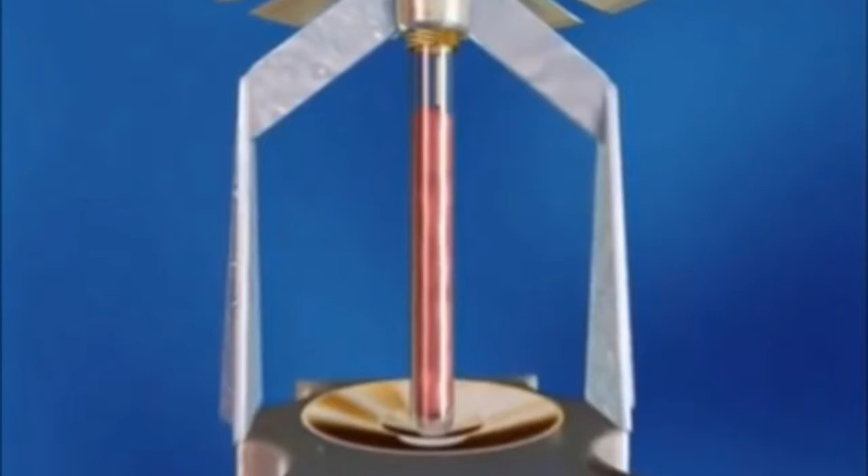Next is the automatic sprinkler system. This system is designed to detect, control, and eliminate fires and warn fire residents. The automatic sprinkler system is usually located at the ceiling in every class, office, library, laboratory, hall, mosque, toilet, and canteen. The sprinkler system is connected to a water distribution.

As you can see here, when heat is detected, the glass component in the sprinkler head fails, thereby releasing the water from the sprinkler head.

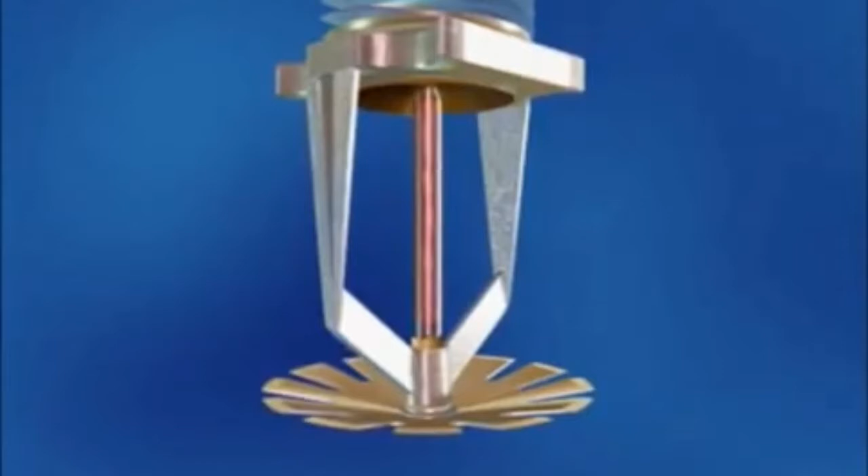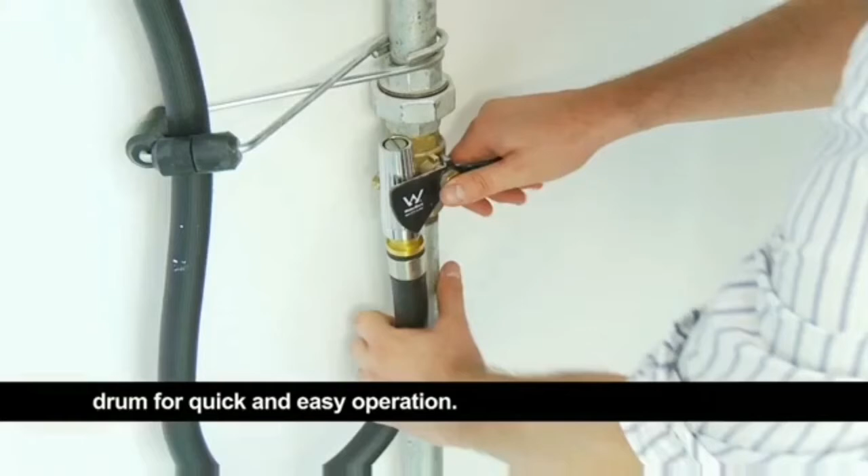This is a fire hose reel, sometimes found in cupboards or metal cabinets that are identified by the words fire hose reel. The hose is 36 meters in length and is rolled onto a hose reel drum for quick and easy operation. The nozzle of the hose reel is housed in a special bracket designed to ensure that it is stored with the control valve in the off position. For operator safety, hose reel should not be used to extinguish fires involving equipment connected to an electrical power supply.

A smoke detector is a device that senses smoke, typically as an indicator of fire. It is usually powered by a central fire alarm system. When smoke is detected, it will signal the fire alarm control panel. The next video will show how it works.

Without further ado, let's move on to the next part.

A heat detector is a fire alarm device designed to respond when the convected thermal energy of a fire increases the temperature of a heat-sensitive element. The heat detector is used to help in the reduction of property damage. Heat detectors are also sensitive to heat temperature, and they will automatically signal the fire alarm control panel.

Next, we will be showing how an automatic heat detector functions. Put the building fire alarm panel into alarm, and that starts the building evacuation process.

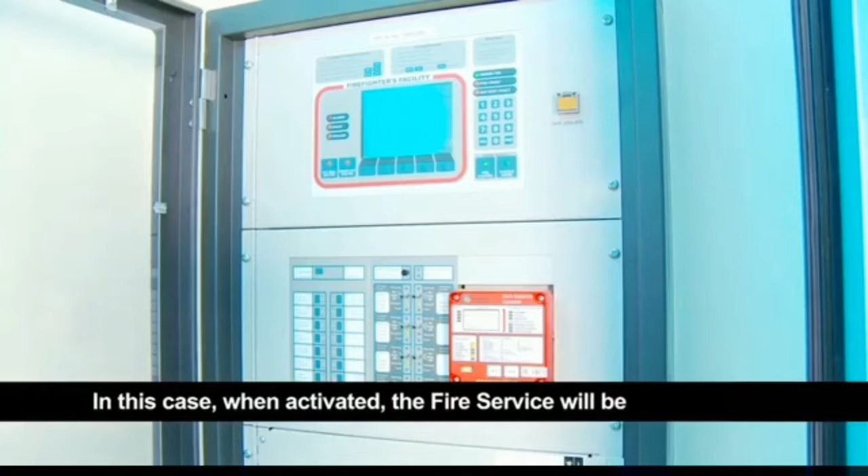In this case, when activated, the fire service will be automatically notified and fire crews will respond. However, in some instances, the operation of the manual call point will only activate the alarm locally to notify the building's occupants.

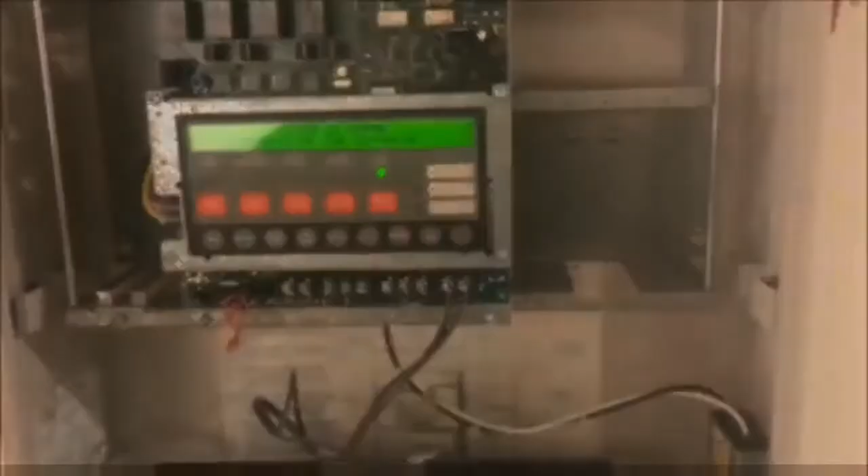Fire alarm must be installed on every floor. The alarm is located on exit routes that are close to the hose reel.

When emergencies happen, someone gives a warning to the other occupants in the building using a manual break glass call point. Once triggered, the alarm will continue to sound automatically. The bell ringing gives people in the building time to get out safely.

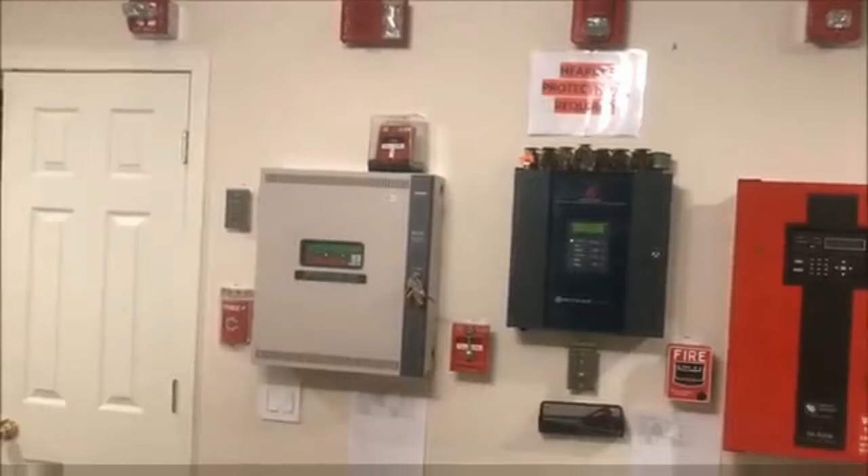These are examples of fire alarm control panels. The fire alarm control panel is located in every block building, on the ground floor level. Its function is to receive signals from all the detectors and trigger the alarm in the presence of smoke or fire.

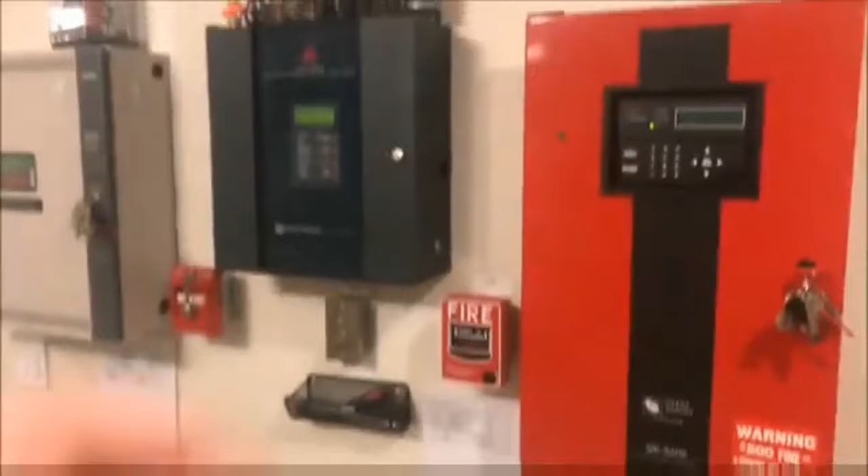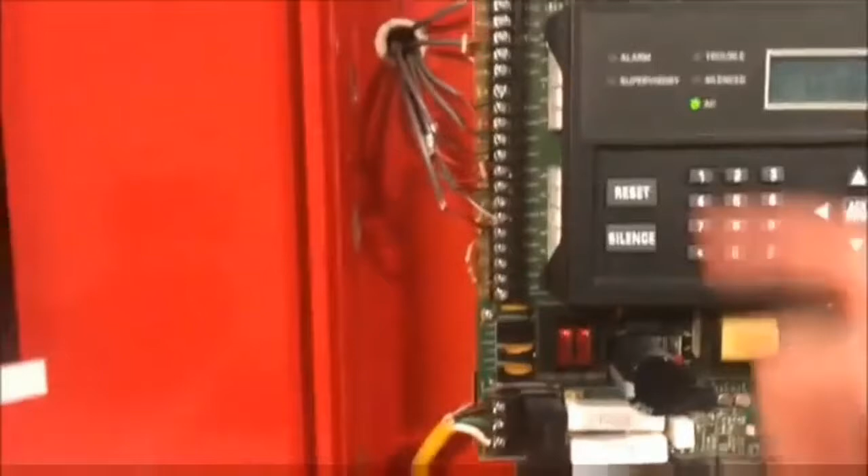A fire alarm control panel, FACP, is an electric panel that is the controlling component of a fire alarm system. The panel receives information from environmental sensors designed to detect changes associated with fire, monitors their operational integrity, and provides for automatic control of equipment and transmission of information necessary to prepare the facility for fire based on a predetermined sequence. The panel may also supply electrical energy to operate any associated sensor, control, transmitter, or relay.

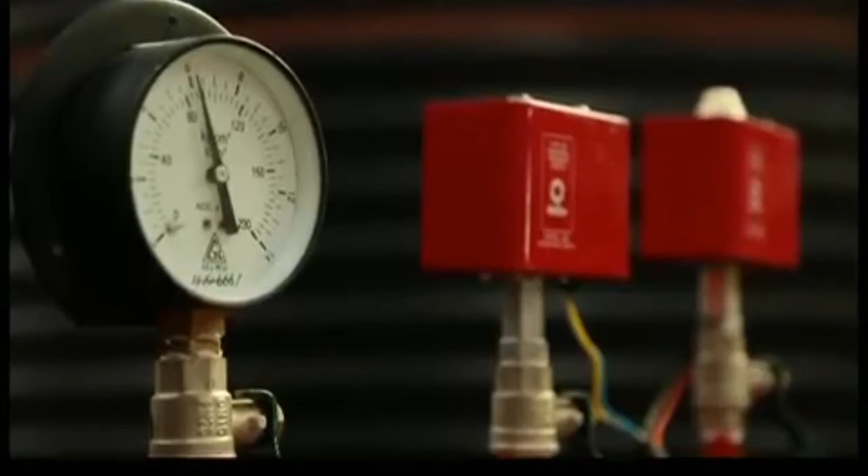A fire hydrant system in Malaysia, in terms of a building's fire prevention system, is a series of components designed to provide adequate water to firefighters. The design of the system is focused on maintaining sufficient pressure to assure water flow.

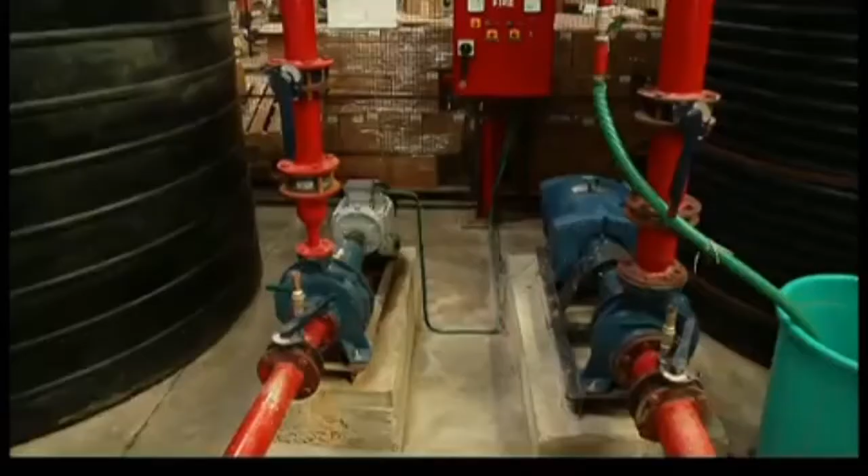Next is the passive fire protection system, which consists of fire-rated doors. Not only that, fire exit signs are also important. The escape routes must be clearly marked and all fire exit signs should be located in places that clearly indicate escape routes. The size of the staircase, its length and width, all follow the requirements in the UBBL.

The staircase and corridor are part of the escape route that connects to the place of assembly. It should be kept clear and hazard-free at all times.

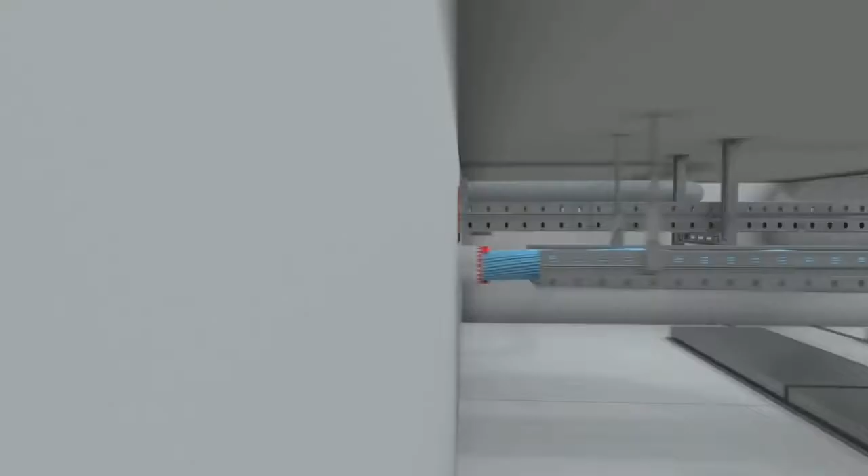Fire compartmentation is also important to stop fire from spreading through the buildings, such as a fire stop. To wrap it all up, a fire protection system is crucial to allow safe evacuation of the occupants.

In order to build a safe school, the school must comply with the building regulations set up by the authority and must consider the basic fire principles. This may serve as a guide for the contractor to build a safer school.

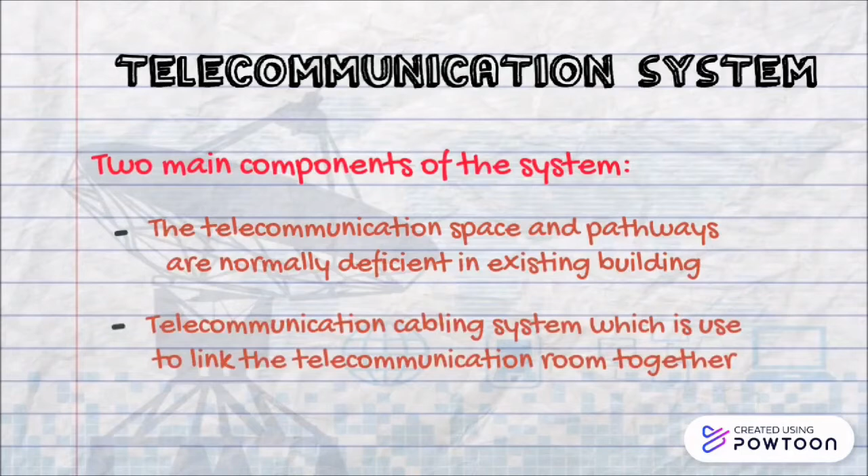The telecommunication system has two main components: the telecommunication space and pathways, which are normally deficient in existing buildings, and the telecommunication cabling system, which is used to link the telecommunication rooms together.

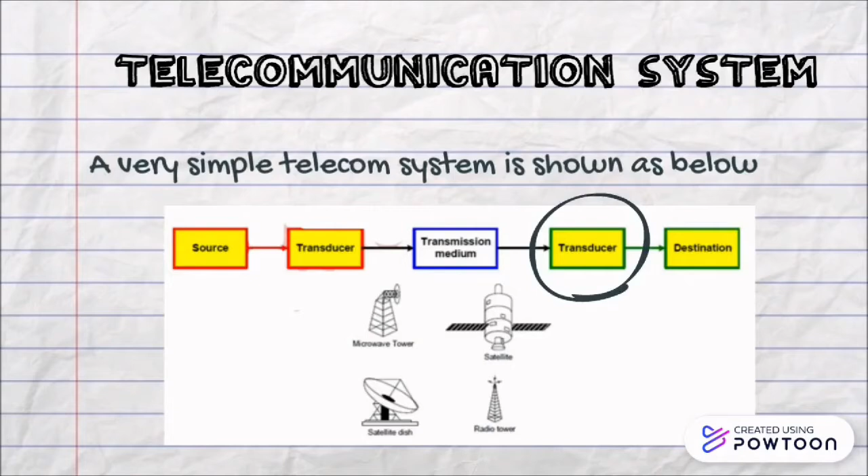At the transmitting end, the source will generate the data. Then the transducer will convert the data into an electrical signal. The signal is then sent over the transmission medium. At the receiving end, the transducer converts the electrical signal into data, and it is given to the destination.

The installation process: it is generally preferred to locate telecommunication and power cables, or a substantial portion of them, outside the view of the casual observer.

For example, it is common to locate and suspend telecommunication and power cables within the ceiling of a building. This serves at least two purposes: it reduces the possibility of a particular cable accidentally or purposely being damaged or severed, and it creates a more aesthetically pleasing environment when such cables are not readily visible.

Benefits of the telecommunication system in a high school building: as an aid in administrative tasks, school records such as attendance and grades can be easily and quickly transferred between departments and also stored in electronic folders.

Next, it enhances multicultural education. It enables students from varied backgrounds to construct cultural bridges by investigating common issues from different perspectives.

It is easy and fast access to information. The best means to access current information is through telecommunications. This could help students access current information in order to finish their homework.

It improves communication skills. Telecommunication can enhance learning by providing unique opportunities for students to practice, demonstrate, and critique written communication skills. It also supplies faster communications. In the amount of time it takes to handwrite and deliver a school memo, electronic messages can easily be distributed, read, forwarded, and written.

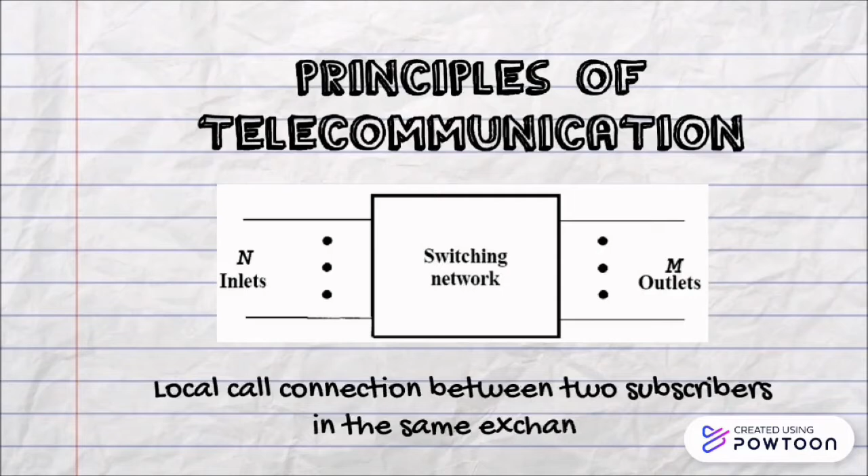Principles of telecommunication. From this figure, 4 types of connections can be established, such as local call connection between two subscribers in the same exchange, outgoing call connection between a subscriber and an outgoing trunk, incoming call connection between an incoming trunk and a local subscriber, and transit call connection between incoming trunk and outgoing trunk.

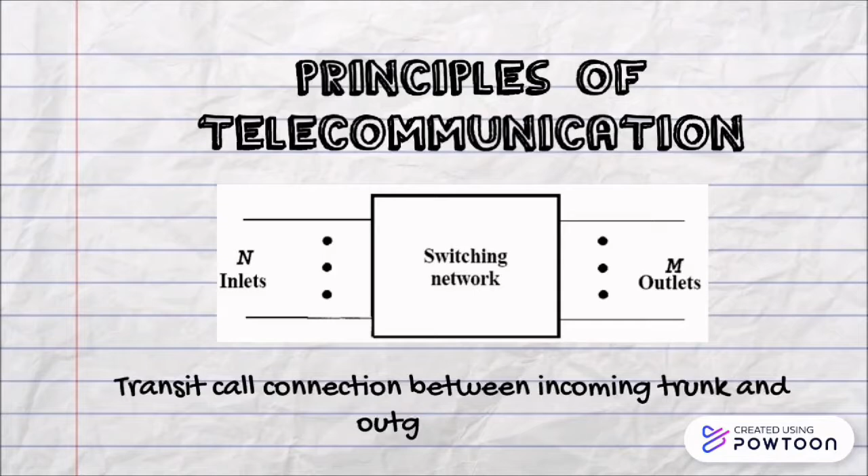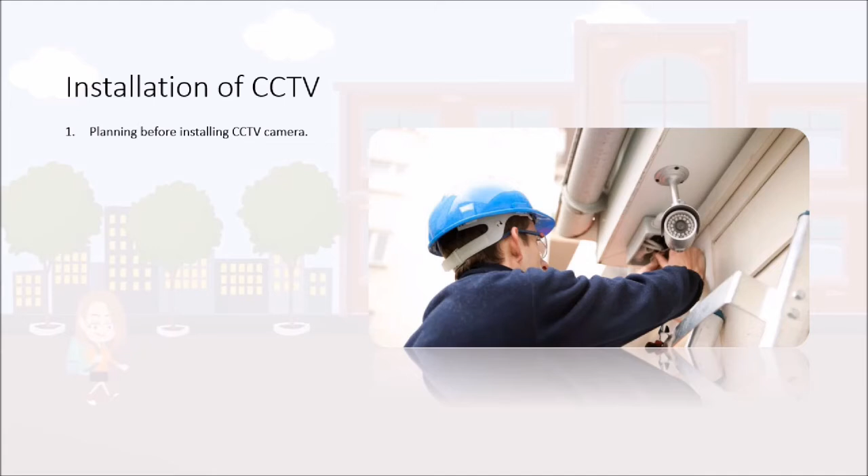The installation of CCTV starts with planning the layout of CCTV, screwing the camera in place firmly, placing the DVR at the appropriate location, planning the pathway for all the cable, connecting the cable output, and lastly, starting the powering on the camera, monitor, and DVR.

School CCTV security cameras are effective to protect both teachers and students, and school CCTV helps prevent antisocial behavior such as theft, vandalism, and etc.

But the problem is, CCTV installation can affect legality and cause privacy violation, the cost of installation is higher, it influences trust of teachers and students, they can be vulnerable, and CCTV cannot stop a crime.

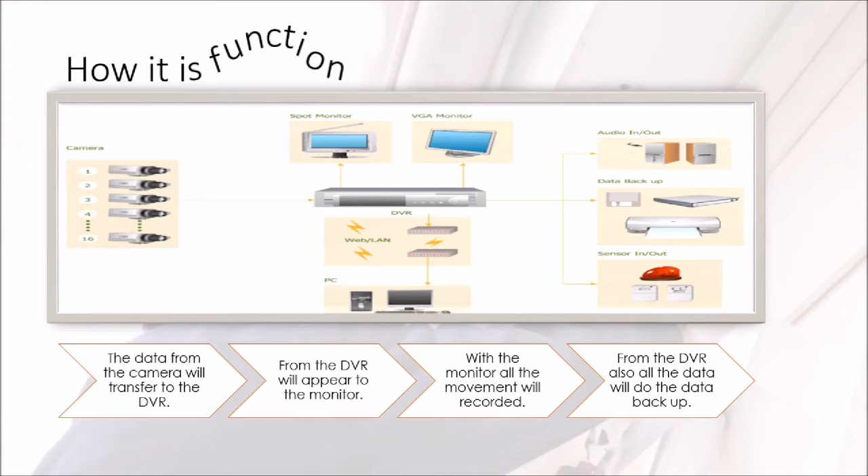Here is the function: the data from the camera will transfer to the DVR. From the DVR it will appear on the monitor. With the monitor, all the movement will be recorded. And from the DVR also, all the data will do the backup.

Based on subcontractor contract, all equipment and materials supplied are new and have been subjected to acceptance inspection and testing by the SO. The requirements must be followed, such as the lifespan, the performance condition, the maintenance, and having a self-diagnostic function.

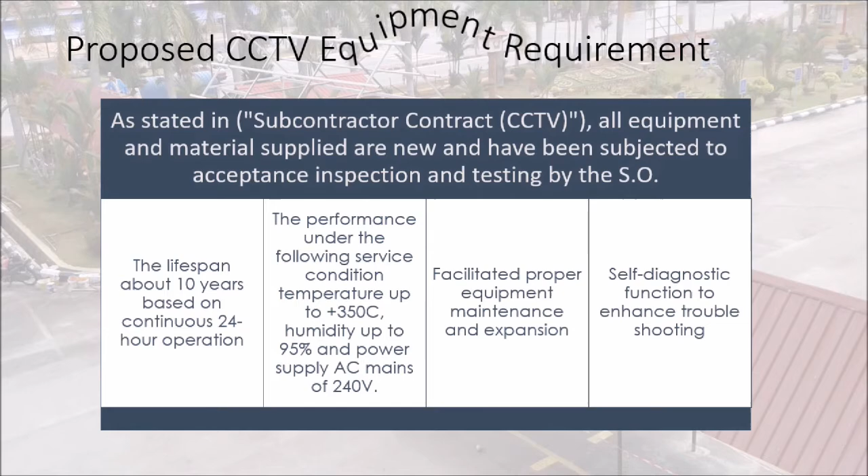The CCTV equipment specification must have a day or night dome camera, video recorder, panel monitor, keyboard and mouse, and lastly, video management software.

The principle of surveillance is to provide information for further action if anything happens, to help monitor movement of the people in the building, and to help improve the security of the area.

The space implications for surveillance are at doors and points of access, school boundaries, pathway intersections, public counters and cash collection points, and also other natural paths.

The building regulations for surveillance are: placed in appropriate location, notify all the students and staff, must not constitute an intrusion, must not intrude in a location where there is reasonable expectation of privacy, and must not have any alleged violation.

Access control system concept is an application like cards, fobs, keypad, and sometimes biometric sensor to unlock doors in such systems. With electronic access control system, each user is given only one key, like an access card.

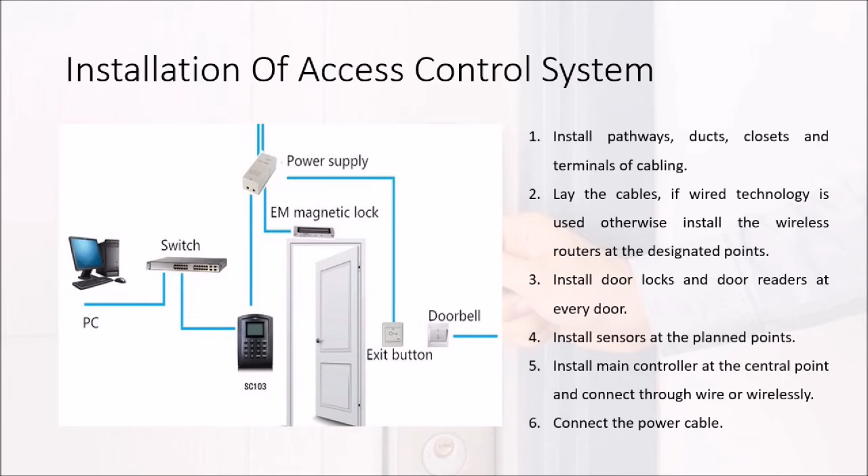The installation starts with installing pathway, ducts, closet, and terminal of cabling. Lay the cable if wired technology is used. Install door locks and door readers at every door. Install sensors at the planned points. Install the main controller, and lastly connect the power cable.

The benefits are: going keyless makes things easier for the teachers and staff. The system can integrate with surveillance video for additional security if anything happens. And also limitation for those in the building can go after hours. For example, the student cannot go to the badminton court after 8 p.m.

But the problem is the access control system can be hacked. When a system is hacked, a person has access to several people's information, depending on where the information is stored.

Now, how did it function? The access card will contact the door reader. The reader permits access to people with valid access cards. It also has a keypad so that users can simply key in their assigned password. The access controller keeps information entered into the access control software to differentiate the valid and non-valid.

The access controller will send information to the door contact to grant access and open the door. One of the best ways to boost school security is to make the switch from standard lock and key doors to an access control system featuring card readers, as it can control all your systems securely.

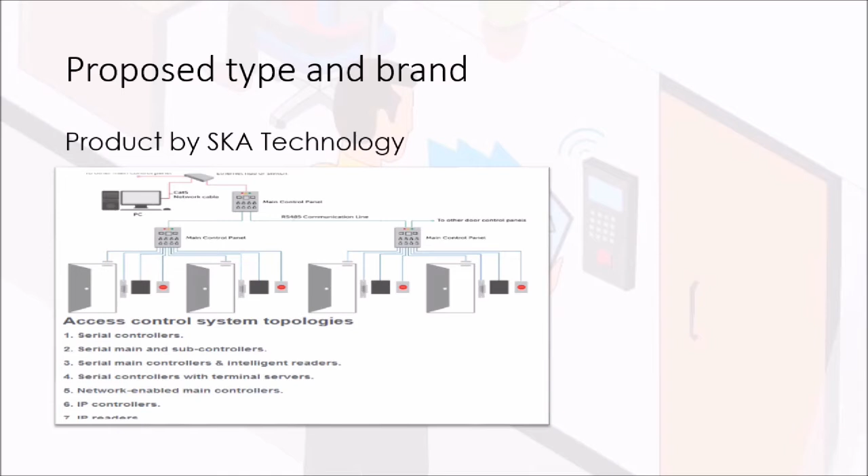The proposed brand is in reference to a product by SKA Technology. In the field of physical security and information security, access control is the selective restriction of access to a place or other resource, while access management describes the process.

The principles are: it offers protection towards the occupants of the building, it also helps reduce trespassing and control movement of the students in the building.

The space implication for this system is at the front entrance of the school and also at the school office, if students forget their ID or lost their card. The swiping station will create a database of attendance records and also allow teachers and school administrators to see the records.

The building regulations for this system are to ensure the locks do not impact a safe exit if anything happens, and to integrate access control with the fire alarm system so occupants can easily escape from the building.

The system of air conditioning in the high school building: for the teachers' room, we will use ceiling cassette and under ceiling; while for offices, we will use ceiling cassette and wall mounted. For classrooms, we will use wall mounted, and lastly for the library and hall, we will use under ceiling style.

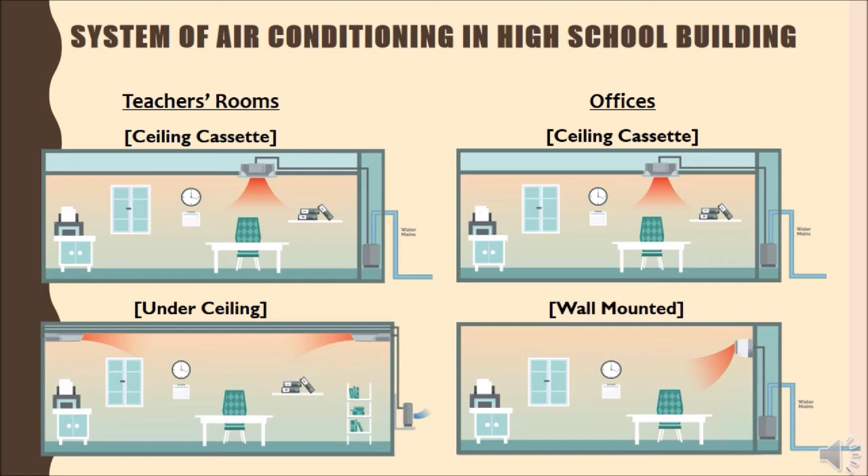The installation process for wall mounted units: firstly, setting up the indoor unit, which is selecting the best location on the interior wall to mount the indoor unit, and running the pipes and cable through the hole in the wall, then connecting them to the unit.

Next step is installing the outdoor condenser, which requires positioning the outdoor unit away from any heavily trafficked, dusty, or hot areas. Check the electrical wiring and connect the piping and cable to the outdoor unit.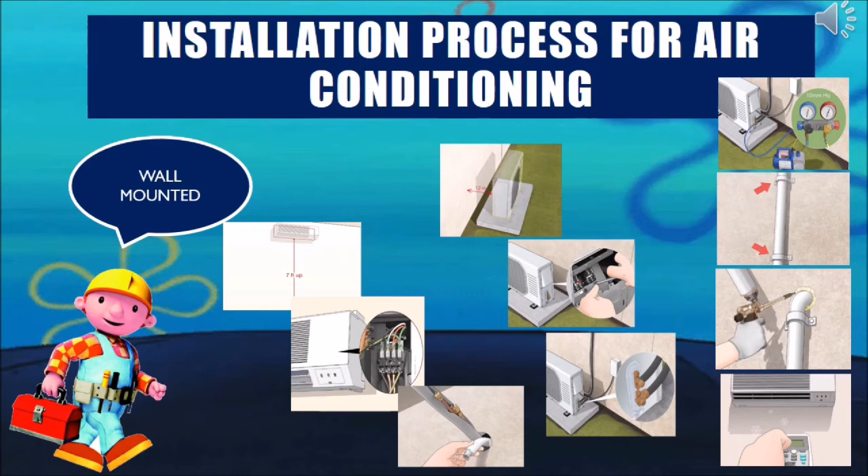Lastly, completing the project: bleed the air and humidity, affix the piping to the wall, seal up the hole in the wall, and turn on the unit for testing operation.

Did you know there are a lot of benefits if we use air conditioning in school? Firstly, it will improve concentration of students and school staff. Second, it will improve the quality of air. Third, it will increase comfort of the students and school staff. And lastly, it will decrease the risk of heat stroke.

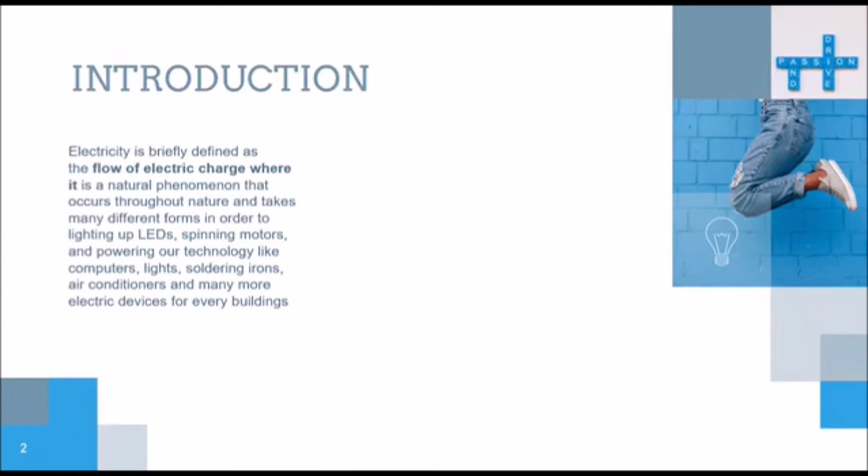Installation process of electricity: the process involves the generation of electricity from the main resources to a substation via transmission line and distribution to others. The electricity industry works in a simple model of converting energy resources into electricity.

For our school, there are two types of resources, which is solar energy and hydroelectric. Solar energy: Suruhanjaya Tenaga was entrusted to conduct the bidding process by inviting private sector companies to build. For our private school, the solar panel was located at the field which is owned by our school foundation.

Hydroelectric: the theory is to build a dam on a large river that has a large drop in elevation. Our school can use this kind of resource because there is a lake and river nearby, and it is used to generate electricity and is considered a hydro system.

Transmission is the second major part of the process, where electricity is stepped up by substation transformers which raise the voltage to increase transportation efficiency, and transferred to the national grid, a highway network of high voltage cable that carries and transmits power across the country.

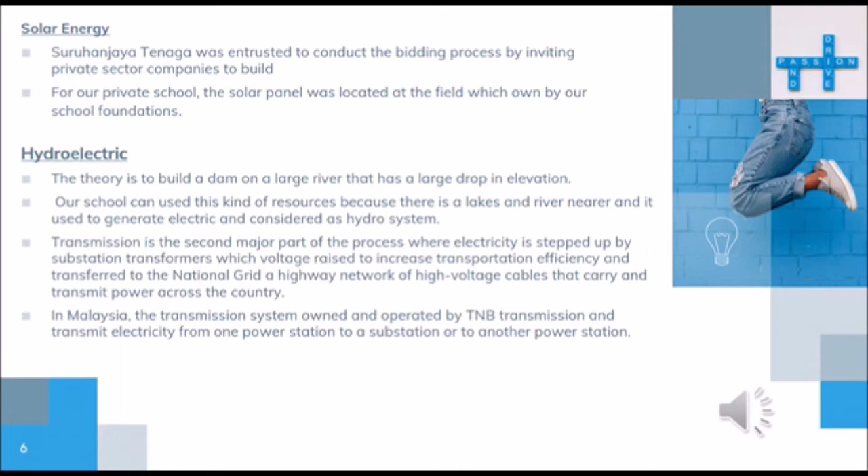In Malaysia, the transmission system is owned and operated by TNB Transmission, and transmits electricity from one power station to a substation or to another power station.

The national grid system is used to transmit electricity all over the country. To transmit and distribute electricity, electric pylons are needed. After being transferred by pylon and transmission line, a transformer is placed.

A substation is part of an electricity transmission and distribution system, where voltage is transformed from low to high and vice versa using a transformer. From the substation, electricity will be reduced to 33 kV in the transformer and then supplied to consumers or schools.

It is important to install a mechanical handling system because it can affect productivity and work done in a building, especially in school buildings, as it can prevent students from being in congested areas and increase the involvement of disabled people. By doing this assignment, it shows the advantages of both systems, especially in providing comfort and efficiency for users.

From the discussion about problems encountered and how to overcome them, it can prevent incidents from happening. Lastly, before we install any mechanical handling system, we need to follow its building regulations to ease the users. That's all from us.